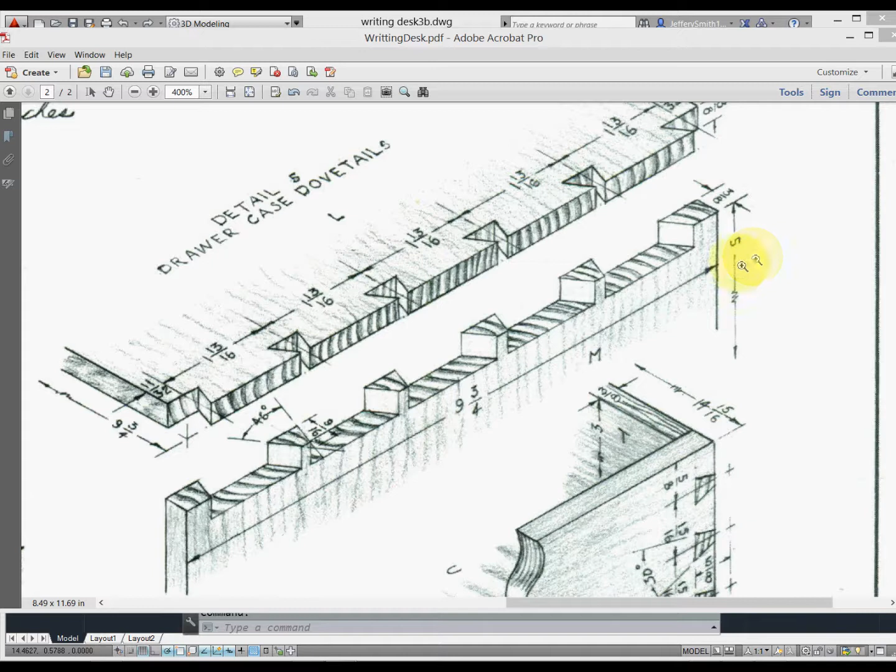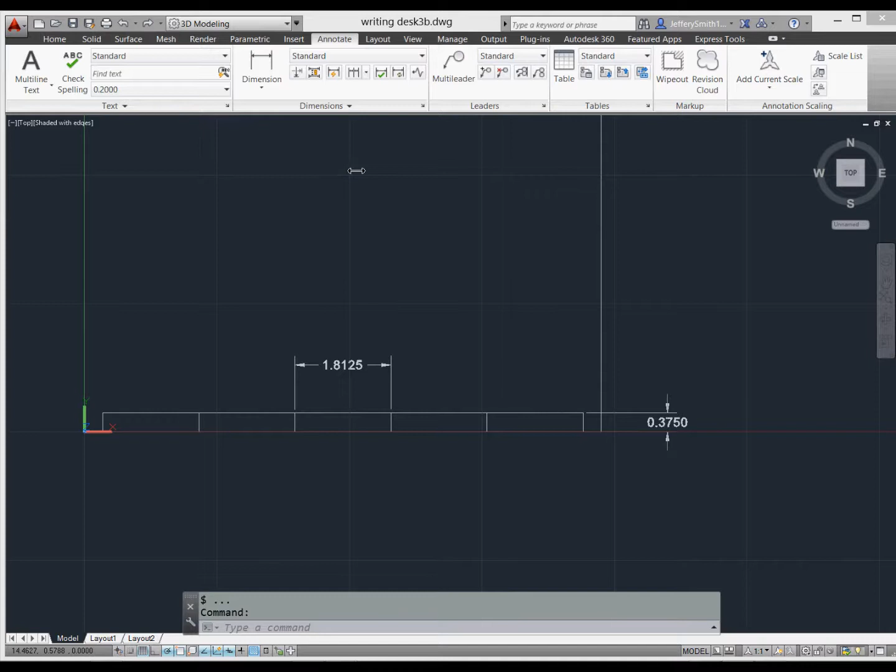So now what I'm going to do is start constructing this dovetail joint here. And I'm going to start with this portion that is 46 degrees and 9/16. And this is going to be typical, or TYP is what you'd see spelled out here. So the way that I'll do that is I will take the line tool and I'll start at the top here.

Let's go ahead and zoom in. And I will come down 9/16 of an inch. So that is going to be 0.5625. Point my mouse in the direction I want to go and type in 0.5625 and press enter. And there's the line. Now I don't need this dimension here. I'll go ahead and get rid of that.

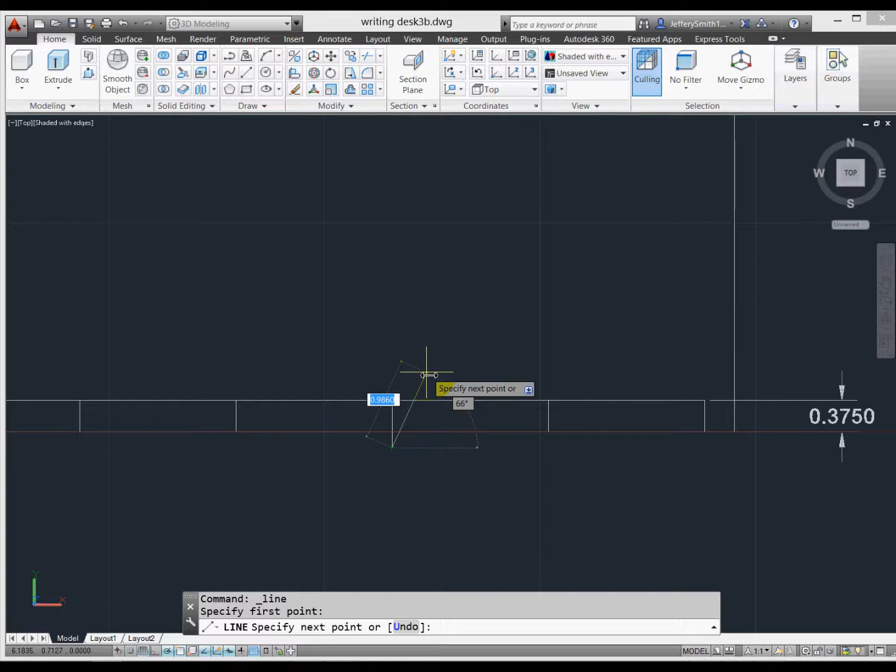So then what it's told me is if I start here and I go up, it is going to be 46 between the two portions. So what I have to do then is take 180 degrees minus 46 and then divide that by 2. So that'll give me, if you do the math here, 67 degrees. So I'm just going to come up, and I'm not going to worry about hitting that line, but I'm going to make sure that the angle is at 67 degrees, and then I'll hit escape.

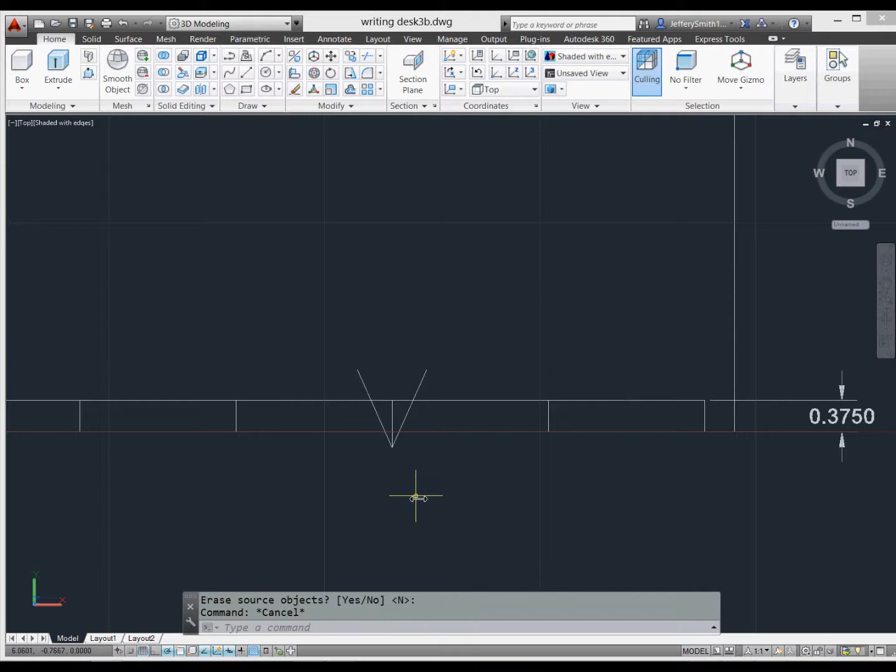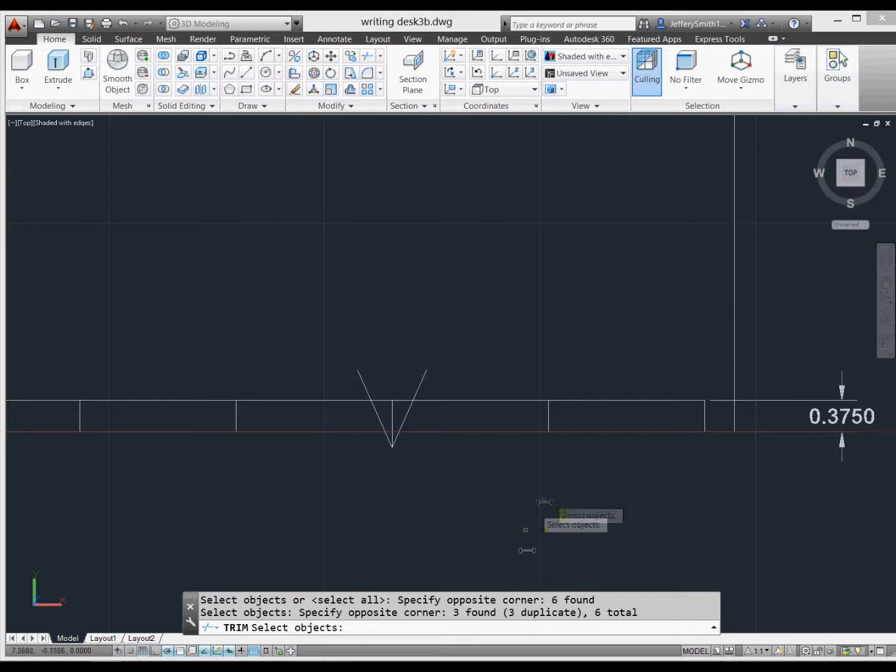And while I'm here, let's type in mirror. Press enter. Let's select the object that we just made. Press enter, and from the base point, we'll just mirror it. All right, and then I'm going to type in trim. And what I'm going to do is trim below and to the right and left. And what I need to do first is select the objects here. Press enter, and then go ahead and trim this.

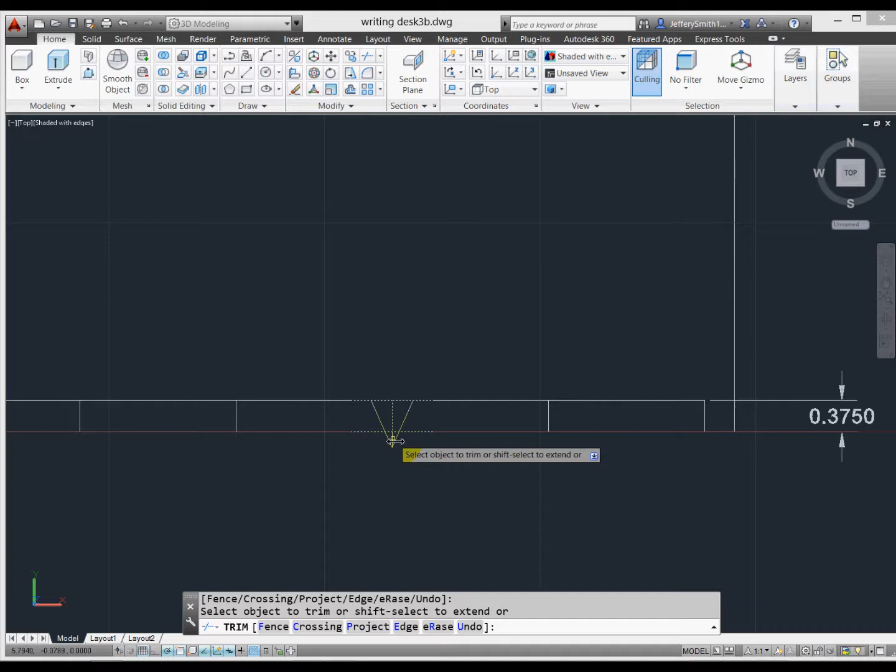So below, and then we want to create this void here. So we don't need this object. We can just delete that in a moment. All right, and below, I can zoom in as I do this if this helps. All right, we can go ahead and delete that line. Delete that line here. Actually, we'll keep that right there.

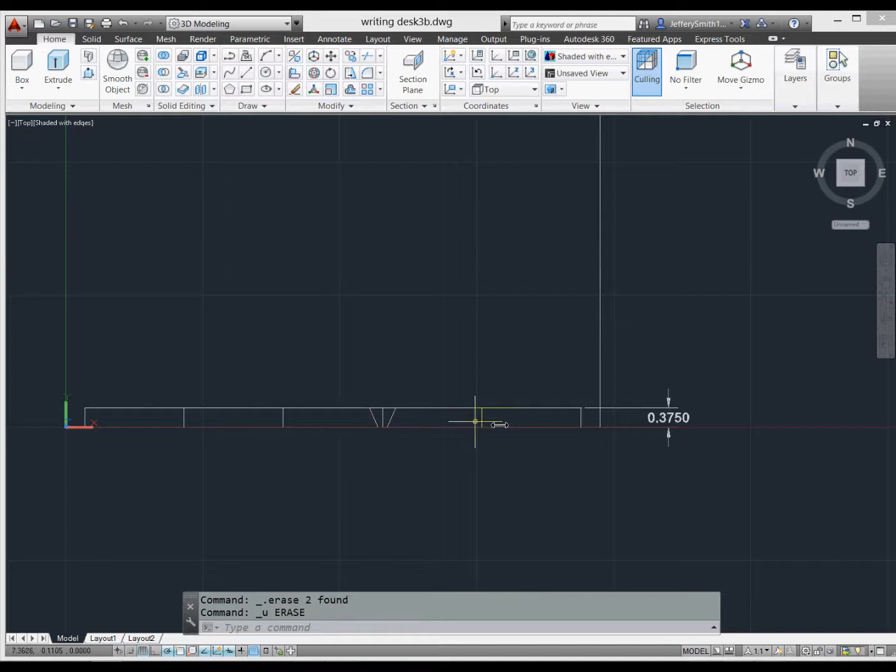Okay, so now what we'll do is mirror this. And let's just get these dimensions out of here. So I'll type in mirror. And what I'll do is I'll just do each line individually. Press enter. Now I want to keep that here so I can bring this down. And since I've already typed in mirror, I can just push enter again, select the object,

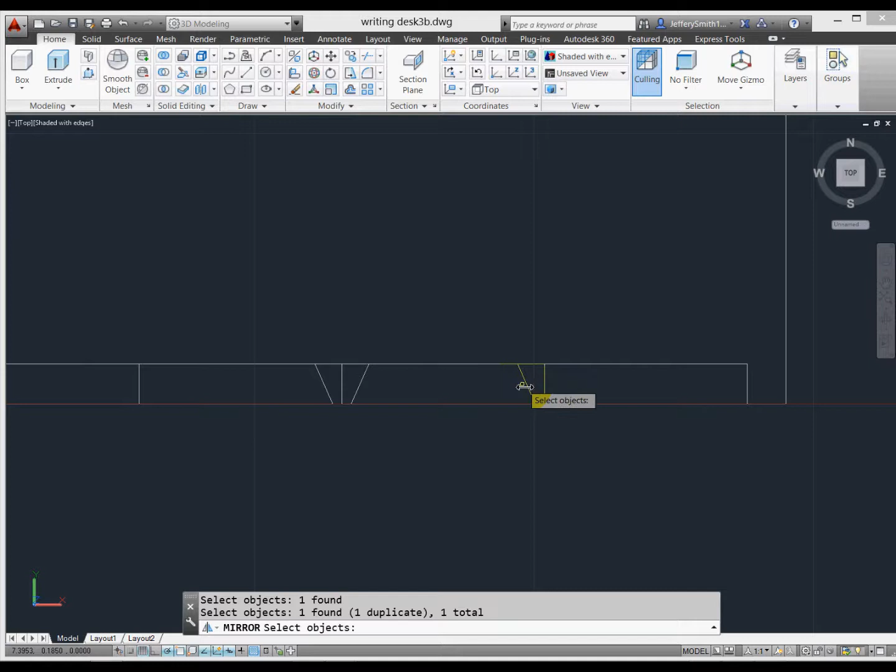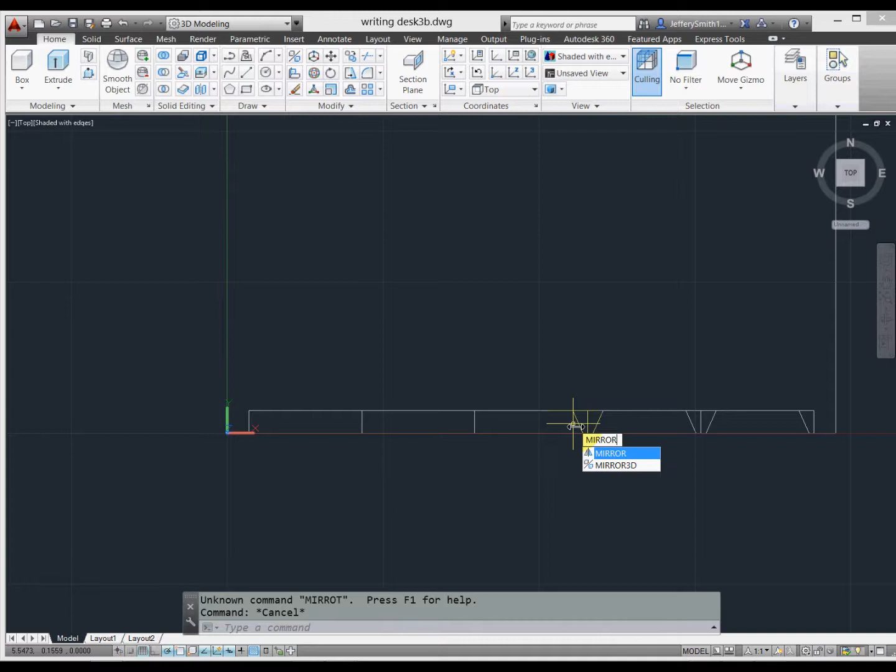and we'll do the same thing this time around, and press enter again, select the object, and I think you can see what we're doing here. Press enter, and we'll do the same on the other side. Now I could probably cut and paste. It might be a little easier, but this is easier for me to conceptualize here.

Press enter again, press enter one more time, and I just keep pressing enter because I'm not changing the tool function. Press enter again, select the object. I'm always hitting either the triangle here or the line. And one last time, select the object. And you can see that we are slowly but surely making these dovetail joints.

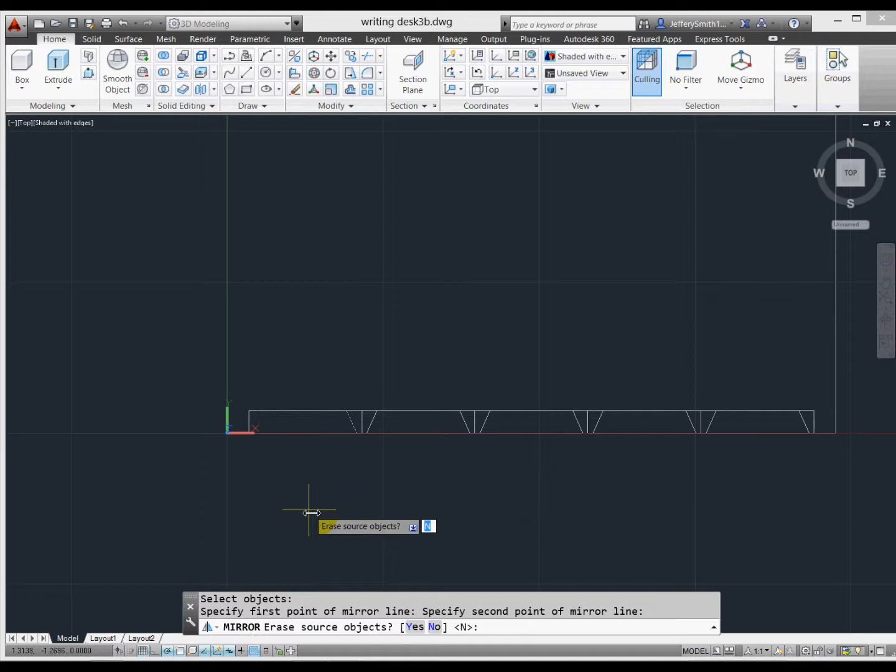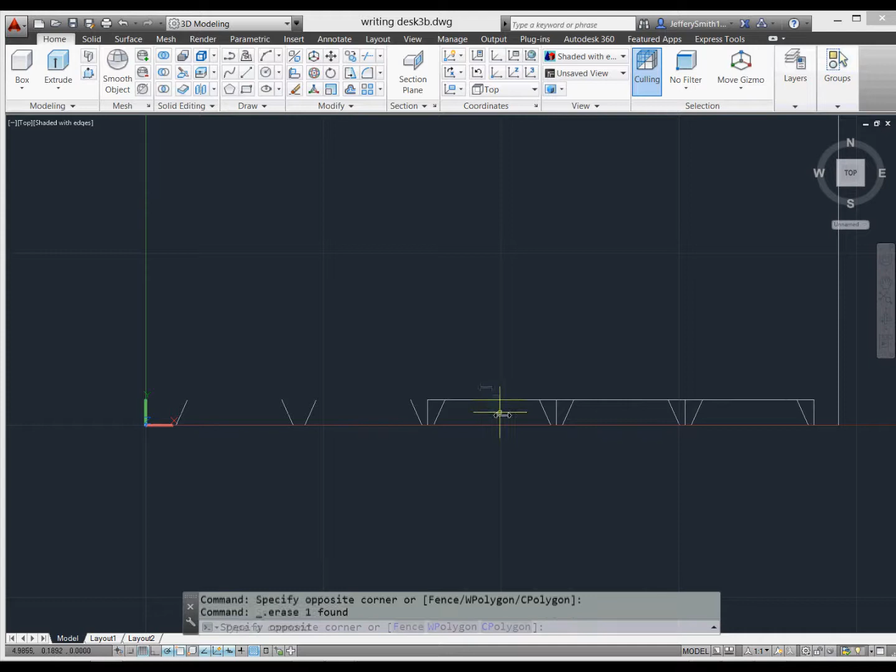All right, so now we know what we want to keep here. We know what we want to get rid of. So what I can do now is just delete the boxes and then delete the horizontal and vertical lines. So delete, and we don't need these anymore. Okay, now we'll keep everything else here for now. And we will simply construct this with a line tool. Come over to the end, escape.

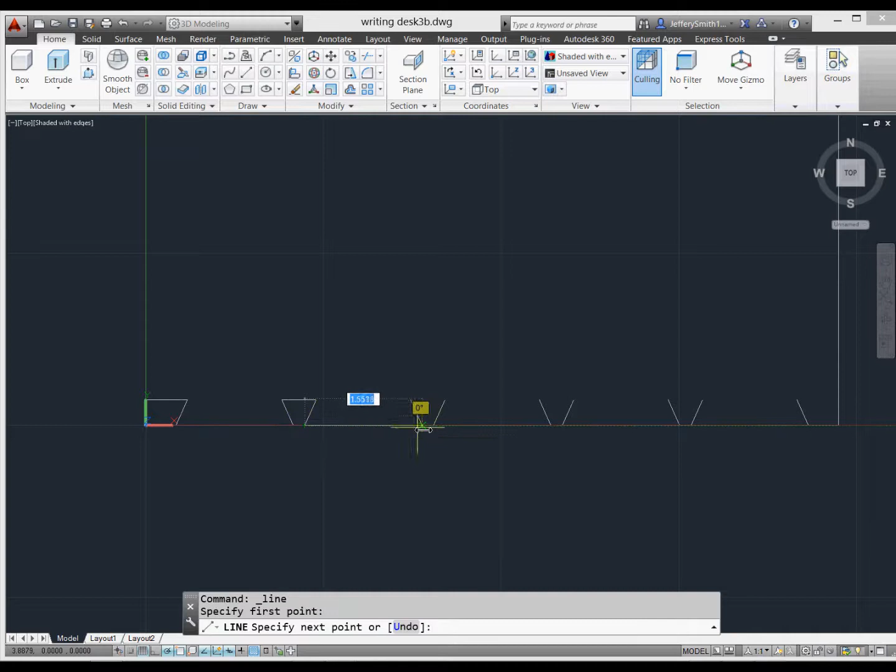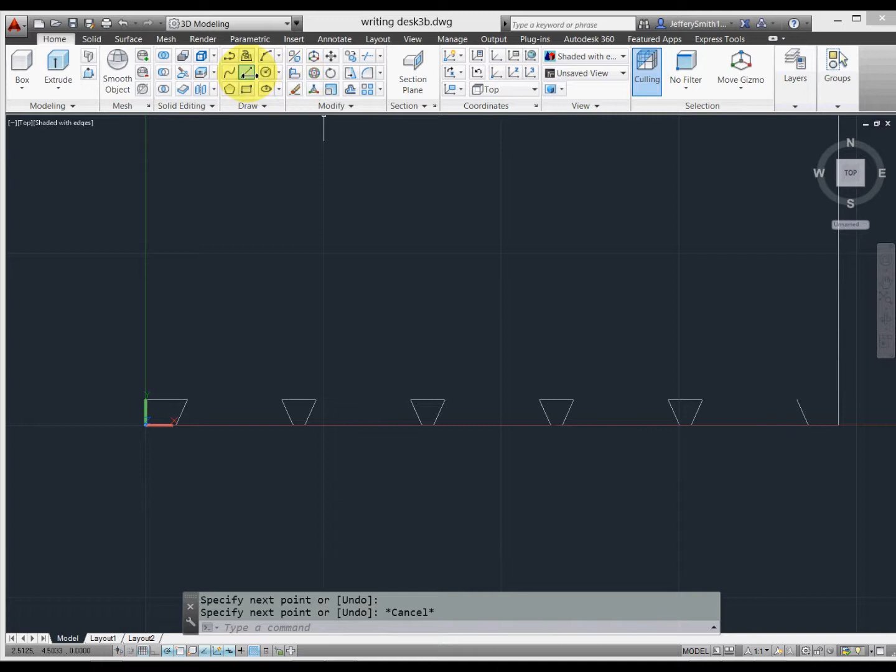And you want to build this just like I'm building this. And it's very important that these lines are going to the next point. Otherwise, we won't be able to region this. And take this one and go over. And I'll take this end and I'll snap it. And the same thing here.

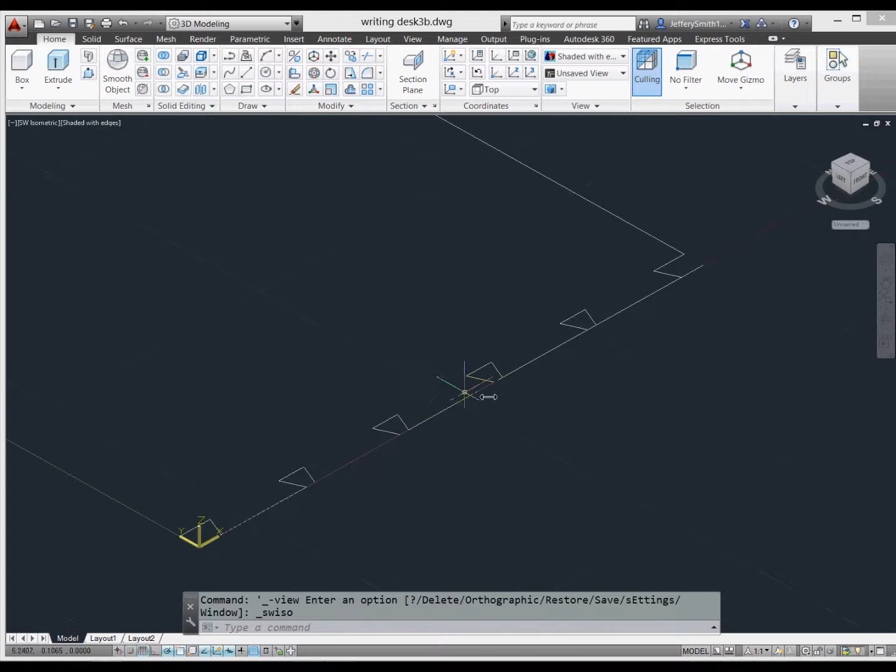Bring this line up. Now I'm not going to region this yet, but we should probably look at this in a little bit more detail here. And there's a line underneath here that we can just get rid of. Hit delete. Okay, so we're getting there.

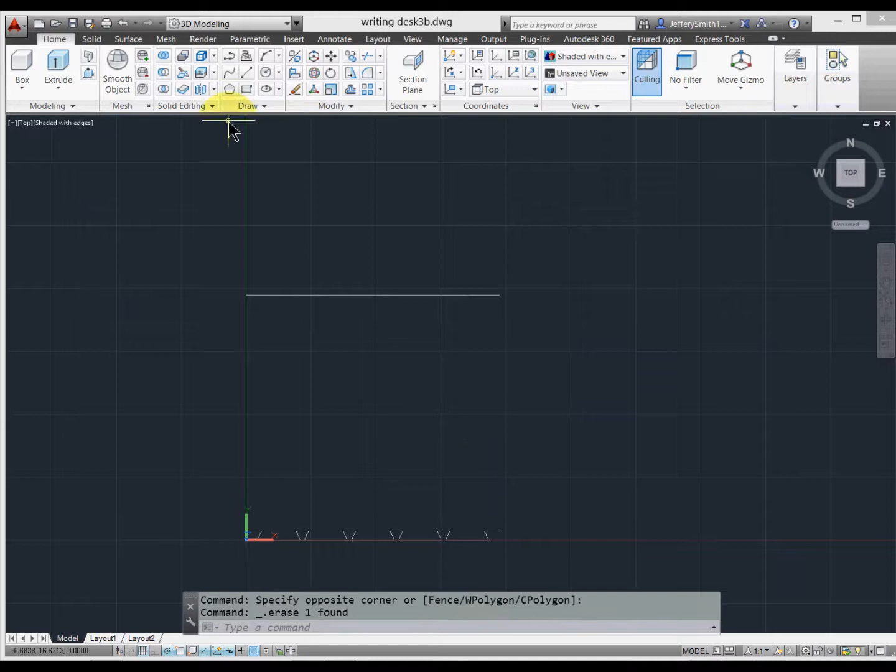All right, so we're going to want to mirror the dovetail joints to the other side at this point. Now I noticed that I probably shouldn't have deleted the one side, so I'm going to just take this line, because if I mirrored it right now I'd be mirroring it around a piece that's been shortened. And let's just reconstruct this and type in 9.75 going straight down.

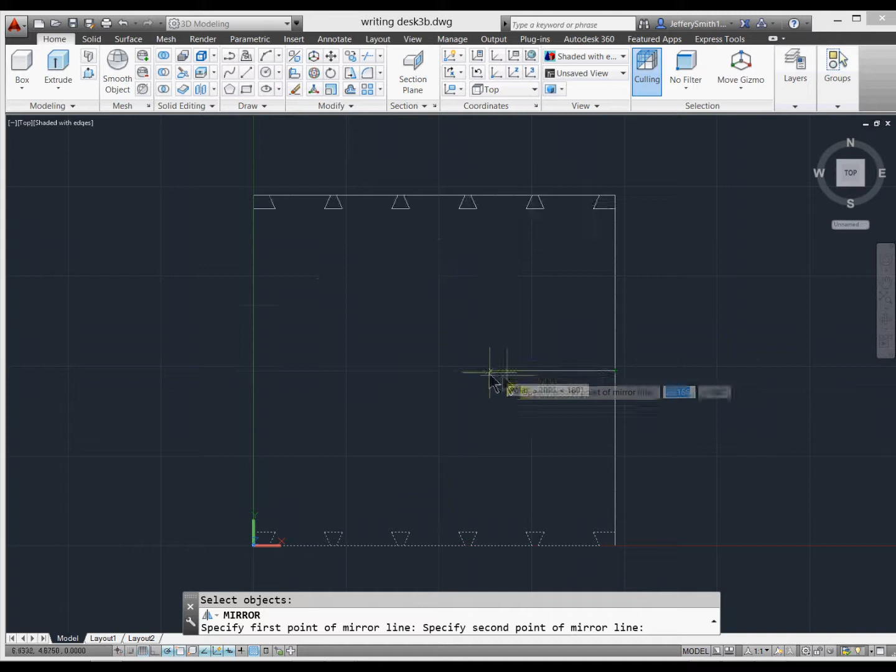Okay, now we'll select the entire bottom row and we'll type in mirror first, M-I-R-R-O-R, enter. Select this entire bottom row, press enter, find the midpoint, come across, mirror, and then we're going to have to clean all this up now. So a couple ways you can do it. You can manually do this, or let's just go ahead, this side is fine. Let's just trim this side.

So type in trim, enter, and we're going to get rid of, actually, sorry, TRIM. Select the entire area, press enter, and get rid of the pieces we don't want. Sometimes you have to double click it.

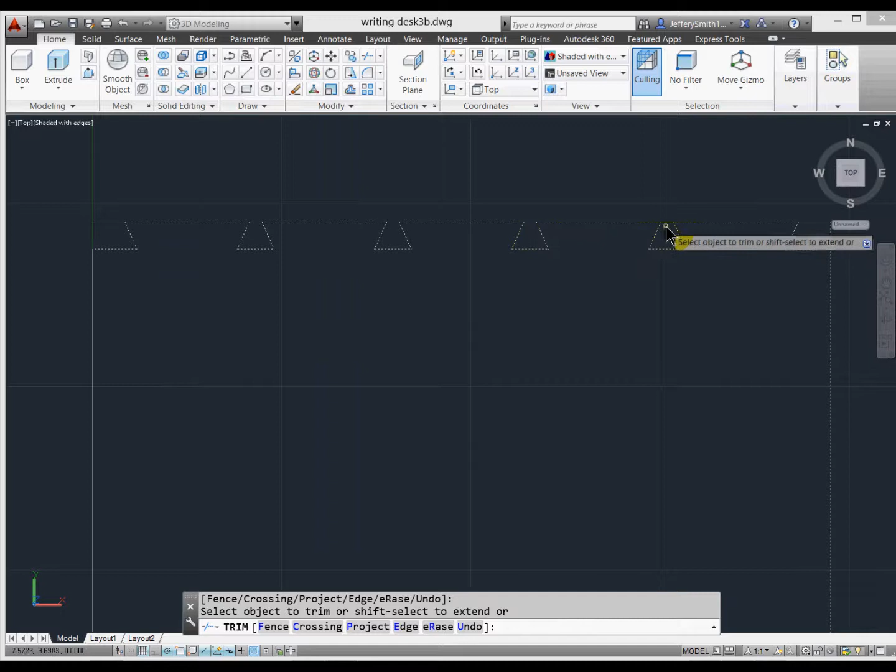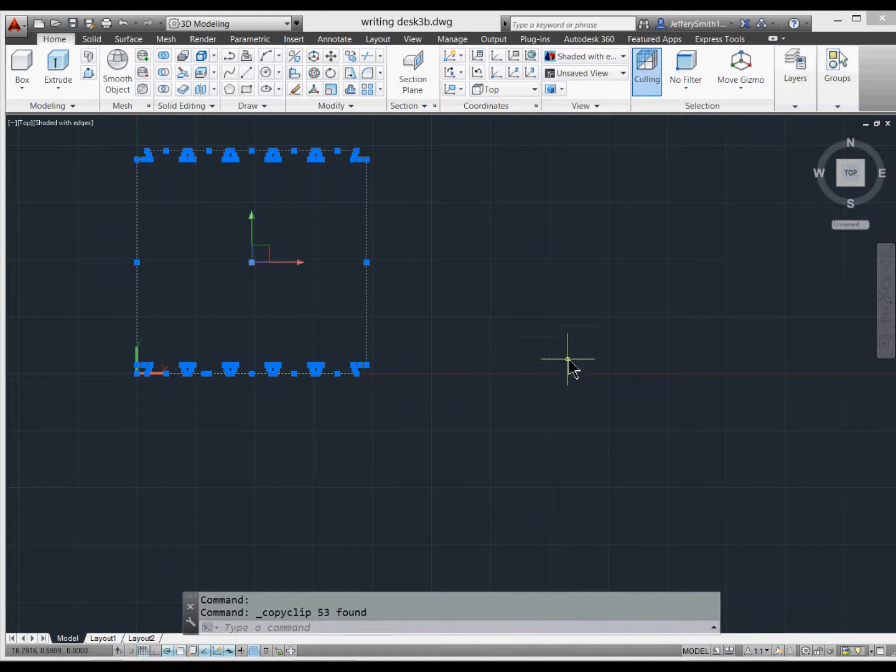Okay. Now if this all worked, we should be able to just type in region. But before we region this, I'm going to copy everything, because I'm going to use this as a template for the other portion of this. Okay, so now we have a copy made. Type in region, select everything, and press enter. Now if it doesn't region, make sure you go back and snap all the little pieces together.

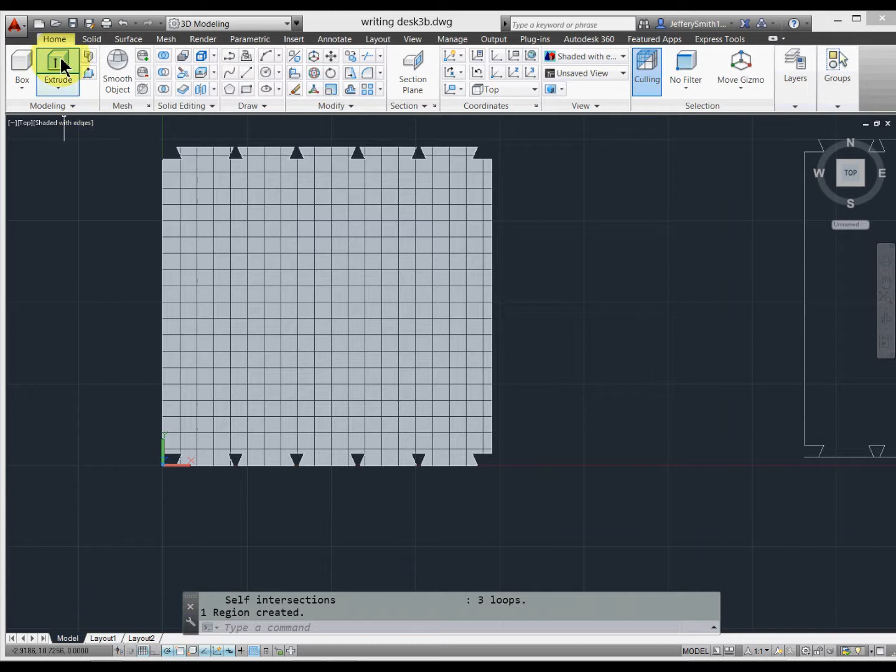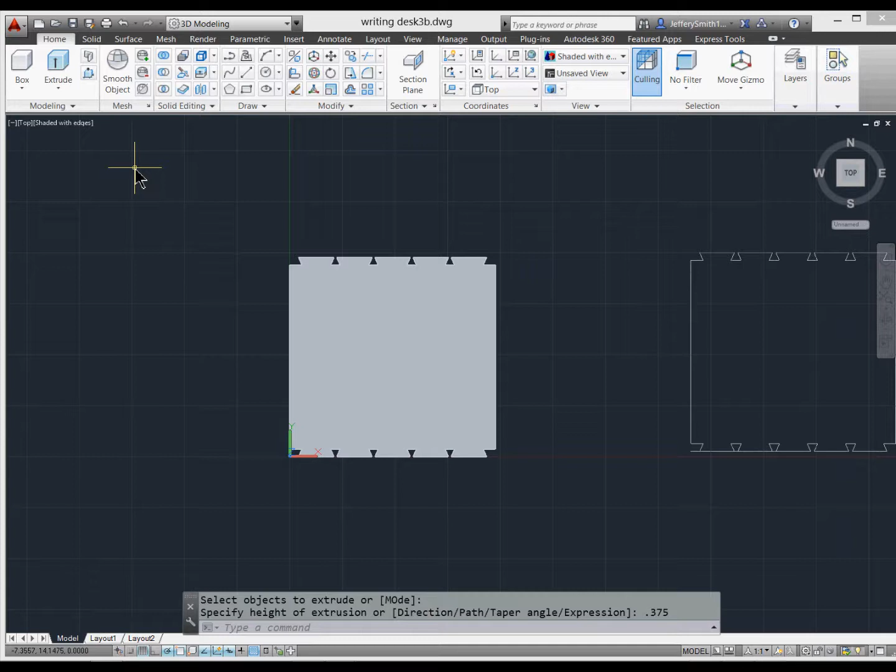So we've regioned it. Now we'll extrude this. Select the object, press enter, type in 0.375 for 3/8 of an inch, and then let's look at it. We are going to need to rotate this, but we can probably do that later. So let's look at this in 3D and make sure that everything is there. All right, so there we go. And so we've actually created what will be the top and the bottom piece.